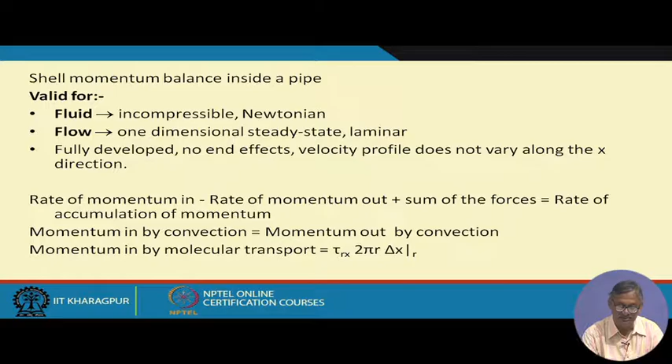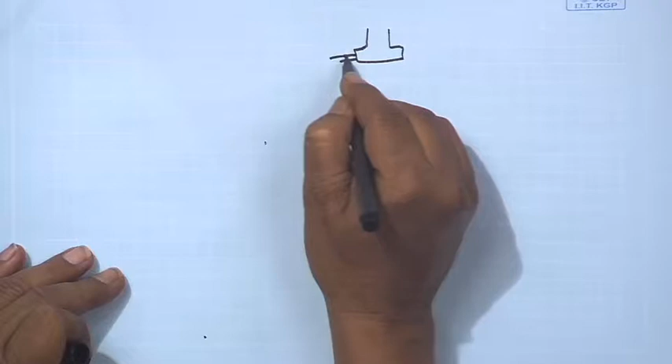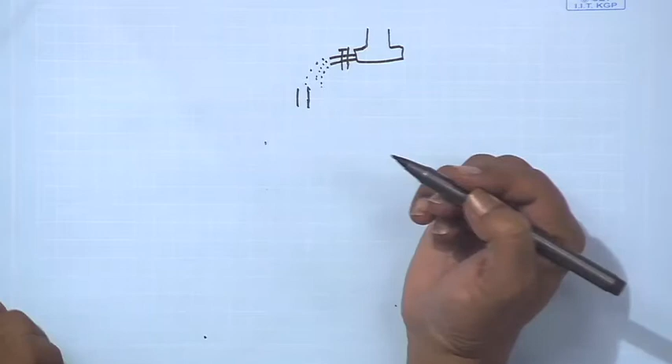If you think that you have a reservoir here, like this, and with that some pipe, there is a valve here. You open this valve, then there will be some point when it will be like this, till the flow becomes a continuous flow, as we gave the example of the hostel. So that flow is fully developed.

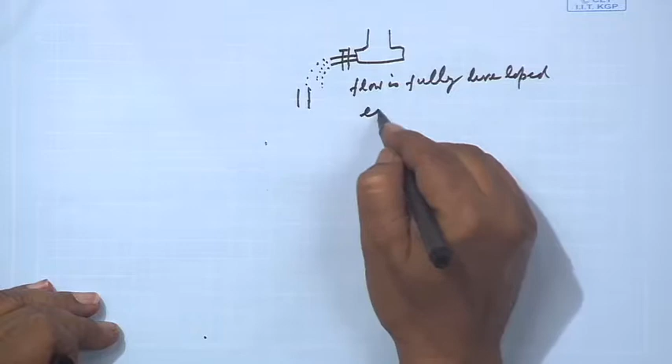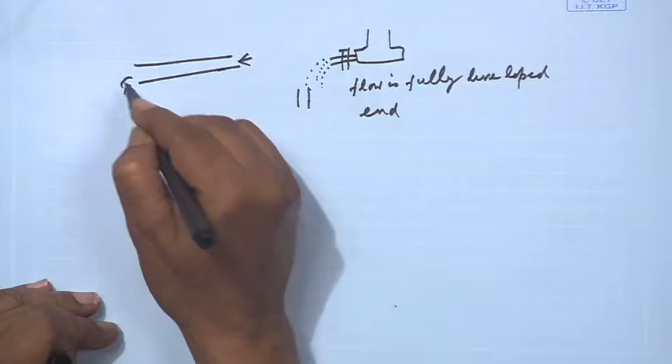This flow is fully developed and there is no end effect. This is what we are saying. End effect means in the pipe, whenever it is coming in, there will not be this kind of maldistribution of the flow. This on either side of the pipe is not there. So there is no end effect also.

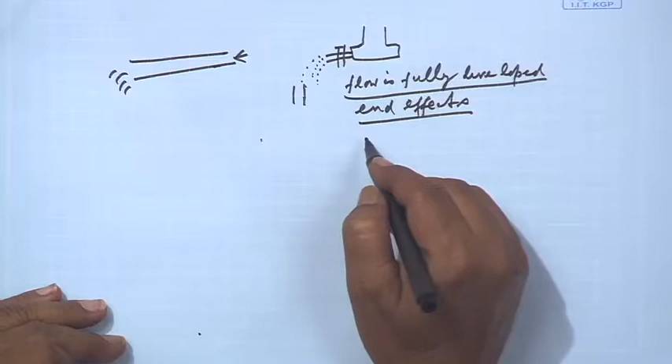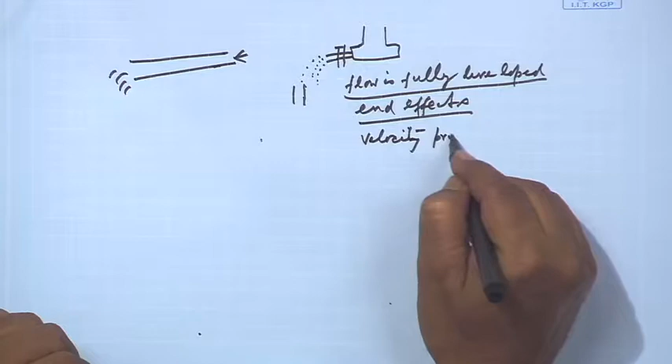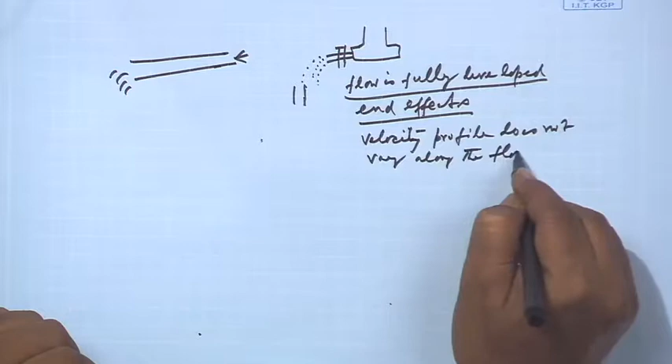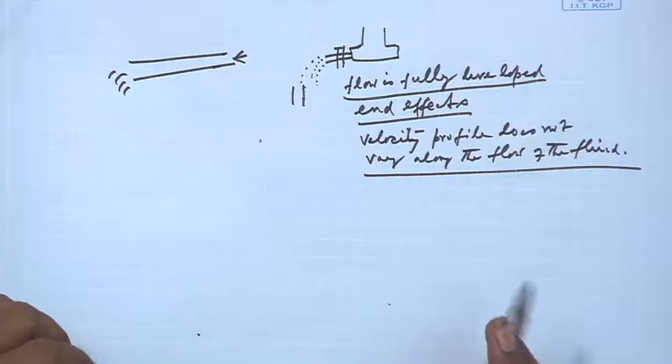This flow is fully developed, there is no end effect, and velocity profile does not vary along the flow of the fluid. This also we are imposing: velocity profile does not vary along the flow of the fluid. So these conditions we impose, and then by doing a shell momentum balance we can tell.

Now, shell momentum balance means here we are taking that shell, this is the section of the pipe.

We assume that in this pipe, the flow is in the R and X direction. If we assume it to be a horizontal pipe, the Z direction is not there. So R is the pipe radius and X is the direction of flow. We have taken a shell like this.

This shell has a length of delta x, and a thickness of delta r. This shell we have considered, and we will do the momentum balance on this shell. This is called shell momentum balance, or control volume for shell momentum balance, on a fluid flowing in a circular tube or conduit.

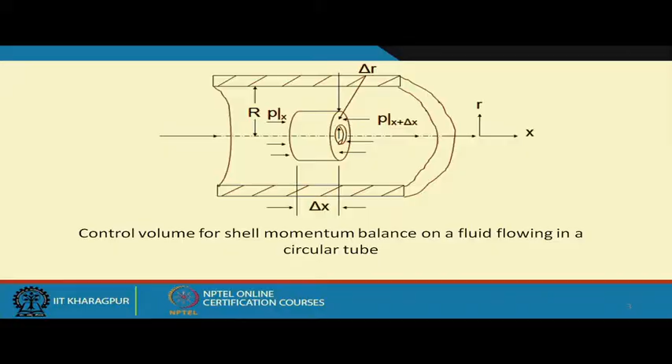So this we will do today, the flow through the pipe. We assumed it to be a horizontal pipe, we assumed the flow to be fully developed, we assumed it is steady state, we assumed the fluid is incompressible, and the fluid is also Newtonian.

We also assume that there is no end effect in the flow, and there is no velocity profile changing along the flow of the fluid.

These assumptions we have made in the beginning, and we are doing axial momentum balance as shown in the diagram, taking a small elemental volume in that pipe section. We will do the momentum balance on the shell and then integrate over the entire pipe.

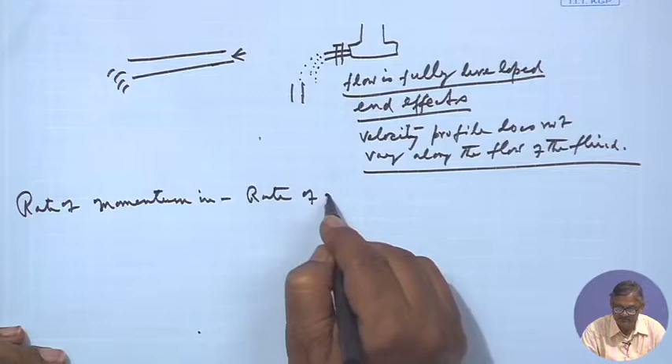So let us do that. The governing equation is: rate of momentum in, minus rate of momentum out, plus sum of the forces acting on the volume element, is equal to the rate of momentum accumulation. Now momentum can be transferred, as we said earlier, in two ways.

One by bulk momentum, that is the bulk flow of the fluid. When the fluid is fully flowing, the bulk flow is one way of transferring momentum. The other is by shear force. Though it is laminar, we can assume the layers to be so close, so small, that the molecules vibrate, and due to this vibration there is transfer of momentum, which we called molecular momentum transfer.

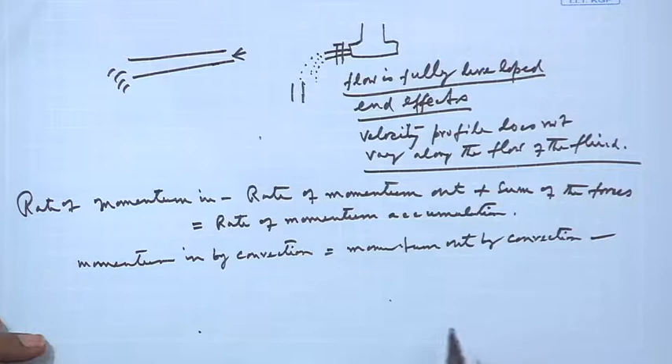Since it is steady state, momentum in by convection is equal to momentum out by convection. So momentum in and momentum out by bulk flow are the same because it is steady state, so by bulk flow there is no net momentum being transferred.

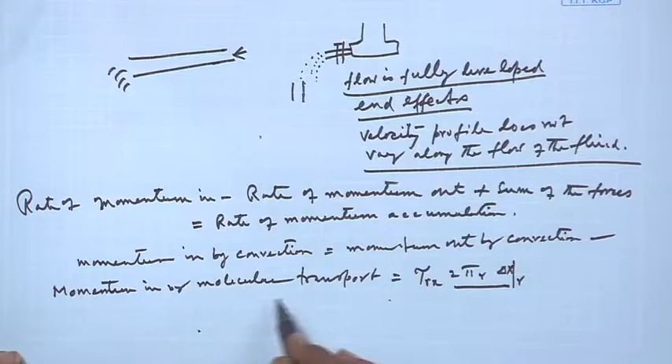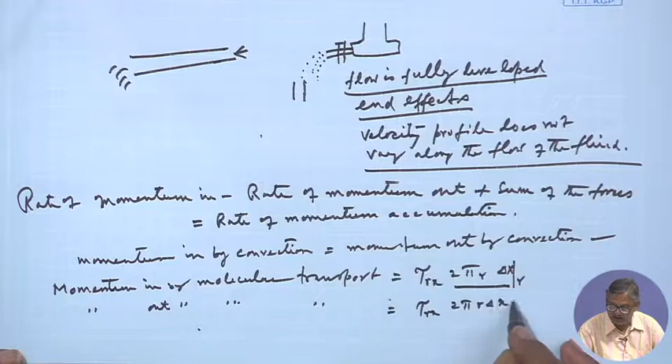Then the momentum in by molecular transport is tau rx times the area 2 pi r delta x, evaluated at the face r. Similarly, momentum out by molecular transport at the face r plus delta r is tau rx times 2 pi r delta x, evaluated at the face r plus delta r.

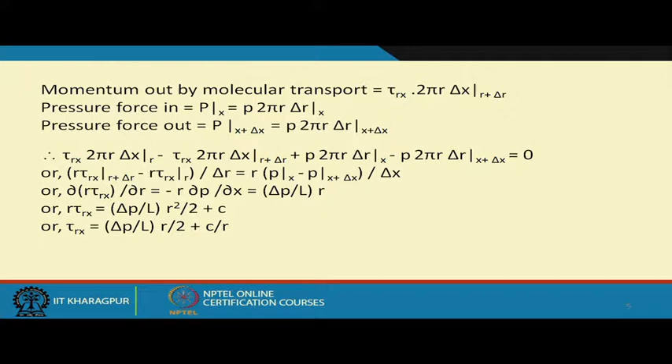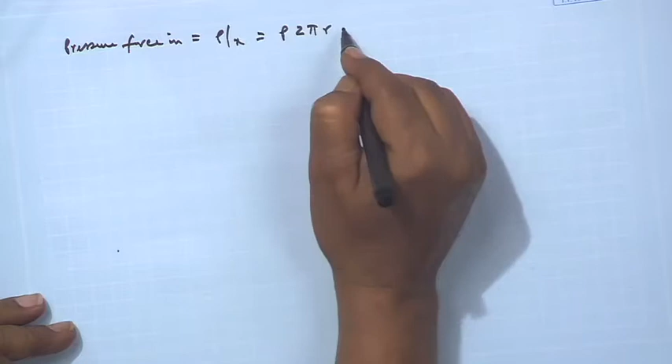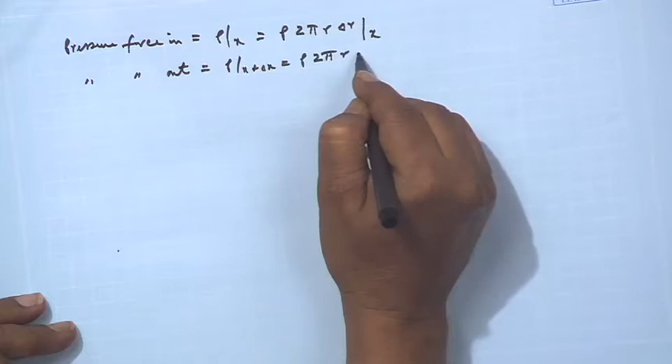Then, among the forces acting on the shell, the pressure force in equals P at face x times the area 2 pi r delta r at face x, and the pressure force out equals P at face x plus delta x times 2 pi r delta r at face x plus delta x.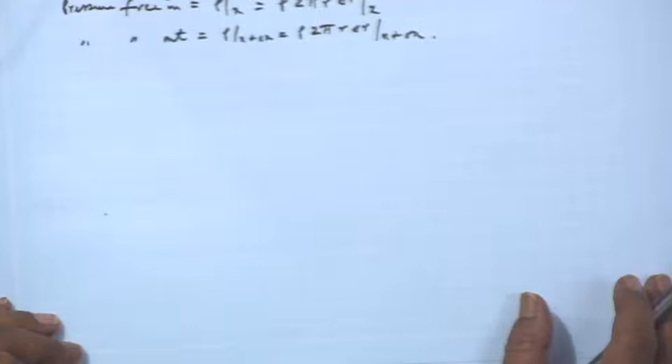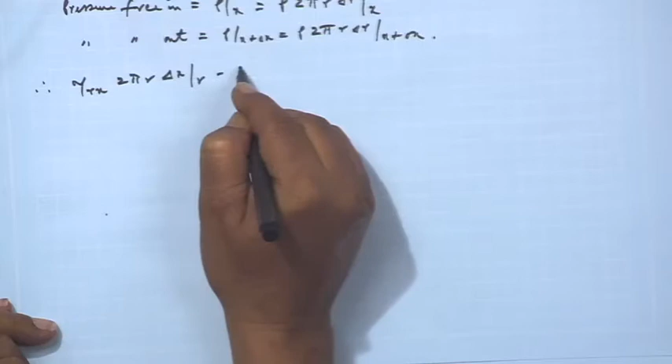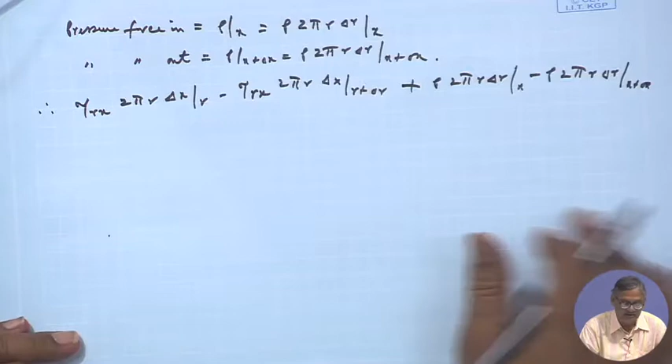Now if we apply the control volume equation we started with: tau rx times 2 pi r delta x at r, minus tau rx times 2 pi r delta x at r plus delta r, plus P times 2 pi r delta r at x, minus P times 2 pi r delta r at x plus delta x, equals zero.

We can divide through by delta x and delta r in all cases, dividing by 2 pi r delta r delta x, which is the volume. Then we can write: r tau rx at r plus delta r, minus r tau rx at r, over delta r, equals r times P at x minus P at x plus delta x, over delta x.

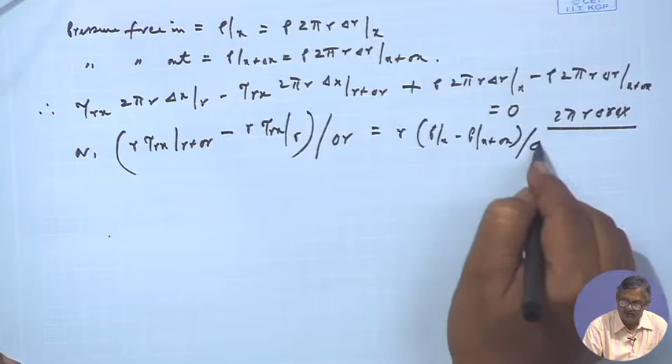So from the definition of the derivative, we can write this as d/dr of r tau rx.

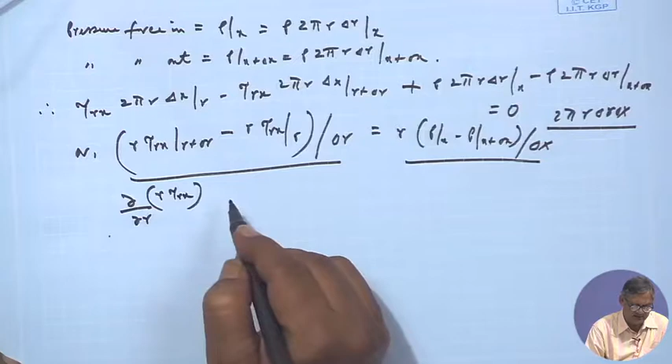This equals P at x minus P at x plus delta x. From the definition of derivative, P at x plus delta x minus P at x over delta x is the derivative, so it becomes negative. So del P del x into r is this side, right. So we can write that this is del del r of r tau r x equals minus r into del P del x.

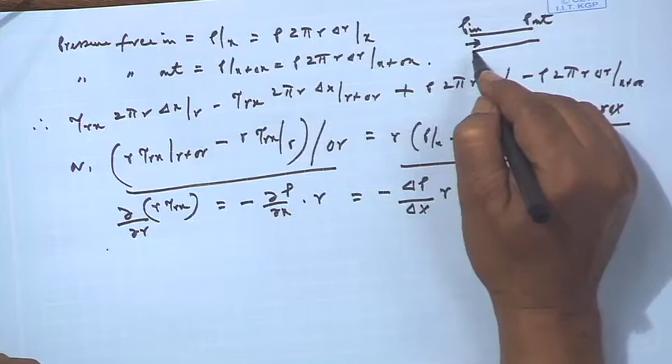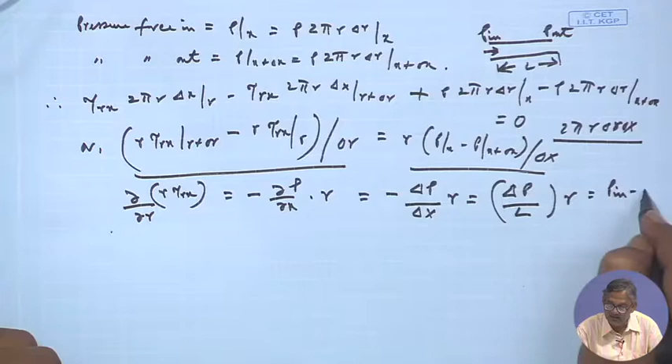So from there we can write this is delta P over, if this length is L, if the total length of the pipe is L, delta P by L into R. Why has this negative gone out? Hopefully you understand that delta P is from inlet high to outlet low. By definition of the derivative, it's P outlet minus P inlet by del x, that becomes the derivative. So this negative has been taken care of by delta P, where delta P is nothing but equals P in minus P out over L into R.

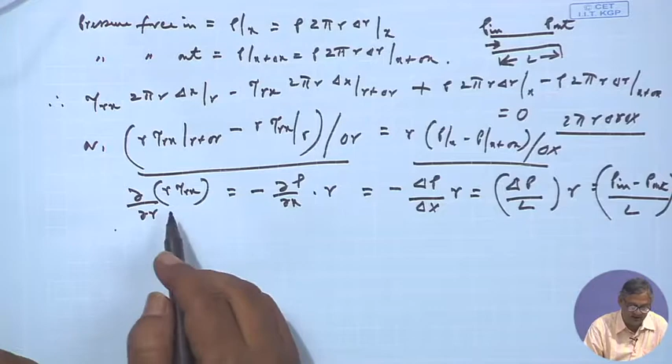So if this be true, then we can write del by del R of R tau R x equals delta P by L into R. So on integration we can write R tau R x equals delta P, which is constant, L which is constant, into R squared by 2 plus C.

So we can write tau R x equals delta P over L into R by 2 plus C by R. So therefore we can say tau R x is delta P over L into R by 2 plus C by R. Now if we put the boundary conditions, what are they?

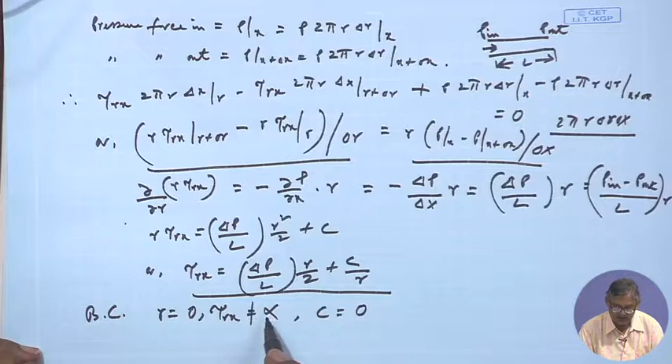At R equals 0, since tau R x is not equal to infinity, we can write C equals 0. Because at R equals 0, if C had some value, then tau R x would have to have an infinite value. Since it is not infinite, it has a finite value, so C equals 0.

Then we can write tau R x equals delta P by L into R by 2, or R delta P by 2L as tau R x. So this, in general, we will use.

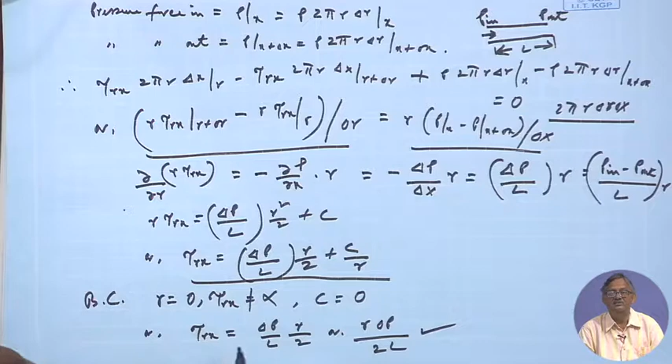Subsequently in many cases you will see this, that when we are doing the shell momentum balance or similar problems, we will start from here: if there is no bulk flow, or the effect of bulk flow is negligible, and it is steady, then whether the fluid is Newtonian or non-Newtonian, we will start from here, that tau R x equals R delta P by 2L, or delta P into R by 2L. This we will start with. Remember this, that this is the starting point in many cases.

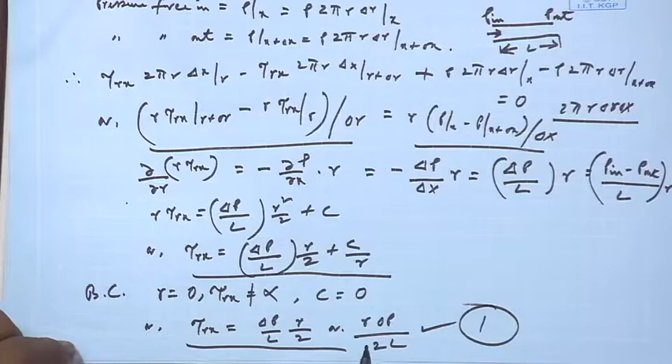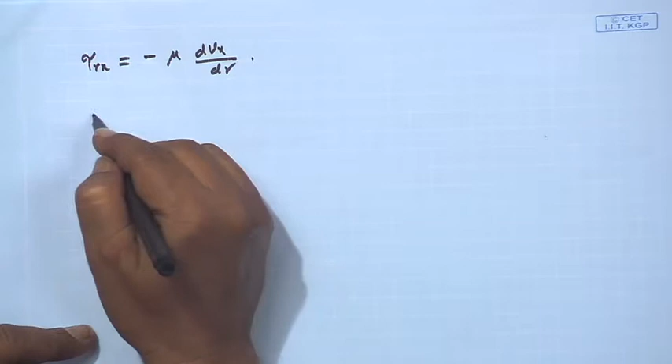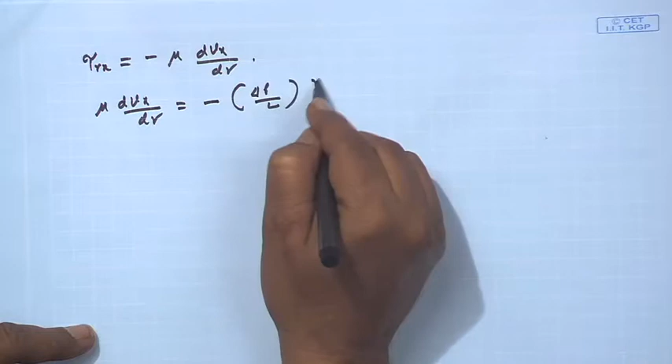Now, since by definition tau R x is nothing but equals minus mu dVx/dr, on substitution we can write mu dVx/dr equals minus delta P over L into R by 2, or dVx/dr equals minus delta P over 2 mu L into R. So on integration we can write Vx equals minus delta P over 2 mu L into R squared by 2 plus the integration constant C1.

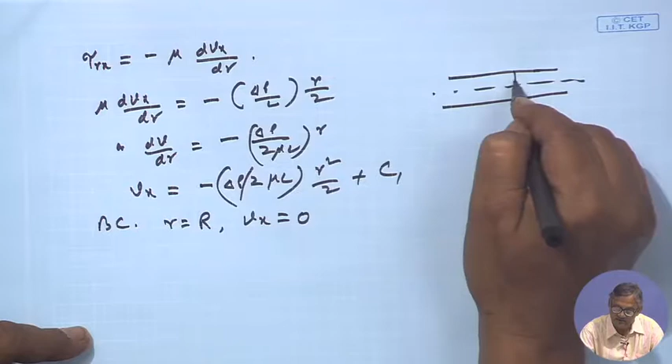So if we write it like this, then we can also state the boundary condition: at r equals capital R, Vx equals 0. This is the axis, and this was R, this was L, or in the x axis this is the r axis, r and x. So at r equals capital R, that is at the wall, Vx is 0 — there is no velocity at the wall. The layer clinging to the wall has no velocity, that we know.

If this is true, we can write mathematically that at r equals capital R, V x equals 0. Therefore, we can write that C1 equals delta p by 2 mu L into R square by 2, so that is equal to delta p R square by 4 mu L, which is C1.

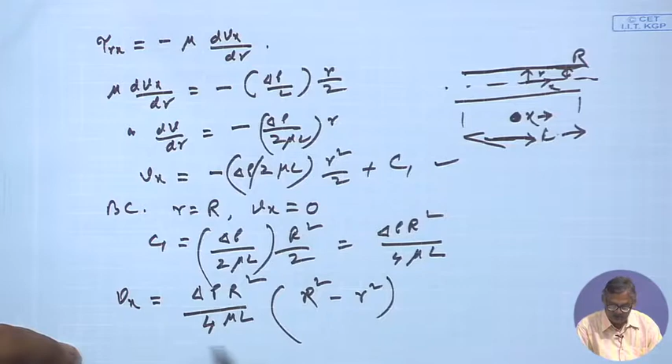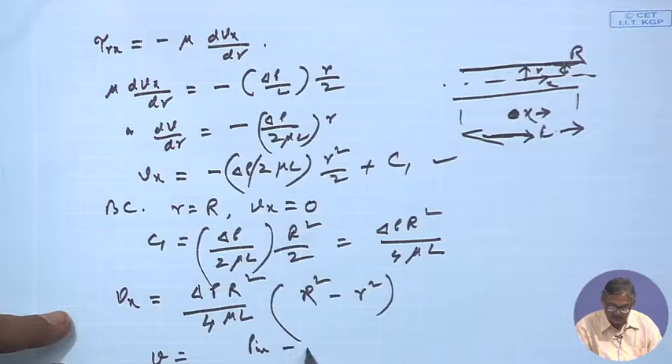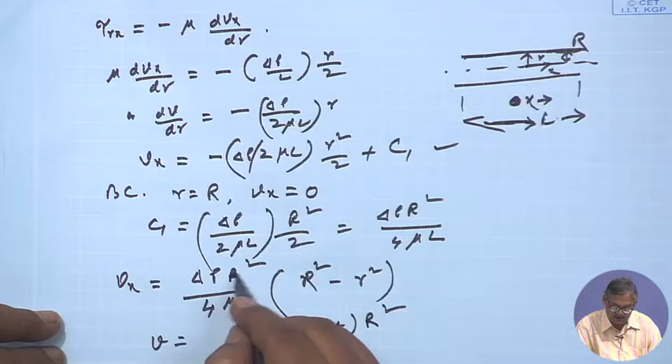So we can rewrite V x as delta p, meaning p in minus p out, into R square. If we take this R square to be there, then this R square does not come out; if we take R square inside, then this does not come, by 4 mu L, now we can write this as 1 minus r by R whole square.

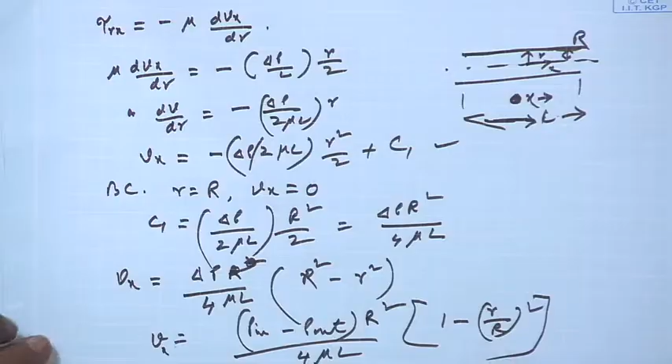So if this is true, then V x is p in minus p out, R square by 4 mu L, into 1 minus r by R square. This is the velocity at any point r.

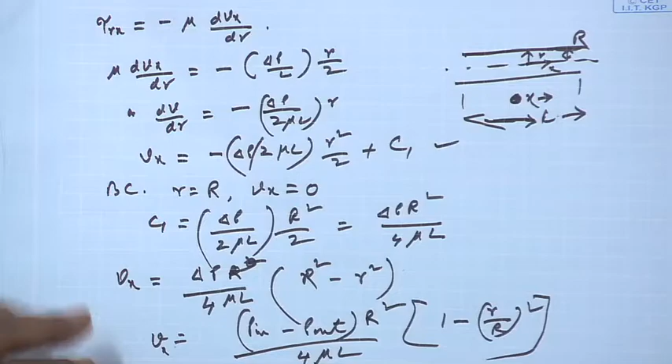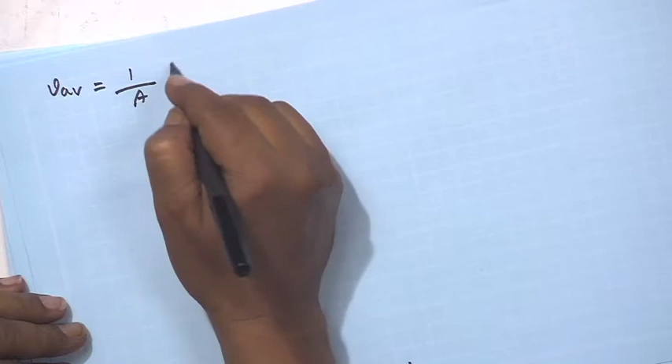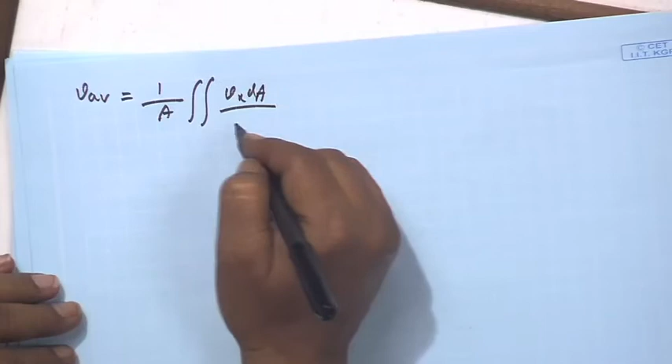Now if we have the average velocity V average, that can be written as 1 by area, integration of V x d area, V x d this area. Now this velocity we can substitute with the V x value.

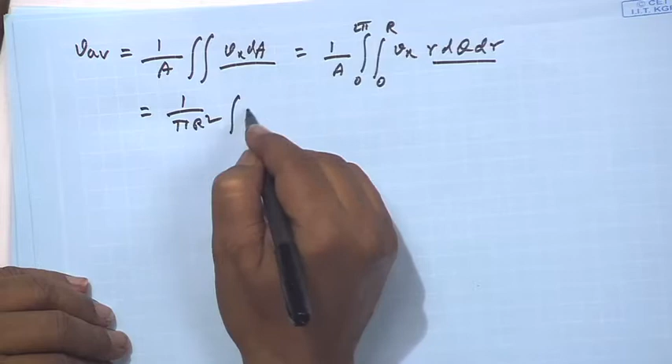This is 1 by A into integration over the area of V x, r d theta dr. This is the elemental area, r d theta into dr, that is area, and this r varies between 0 to R, and theta varies between 0 to 2 pi. So we can write, and this area we write as 1 by pi R square, and we can say this is 2 pi r dr, rather V x.

So on substitution of the value of V x, we can write 1 by pi R square, integral of r into delta p by 4 mu L, into R square minus r square, into dr. On simplification we can write this, again between 0 to capital R, as 1 by pi R square, and this on simplification can be written as...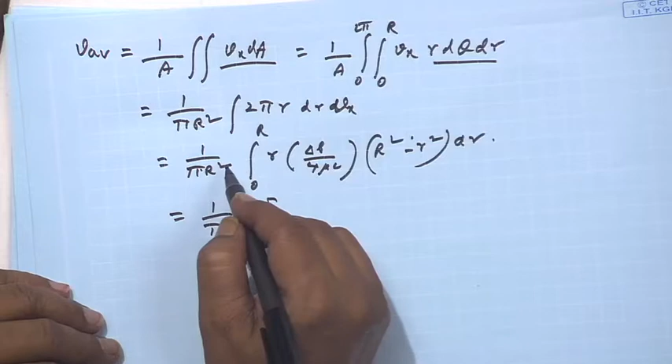2 pi r, okay, this pi r, 2 pi r, that comes out, so pi R square here. That means this pi r goes out from here.

So we can then write this as equal to P0 minus PL by 8 mu L into R square, that is equal to P0 minus PL by 32 mu L d square. So V average then is equal to P in minus P out over 32 mu L into d square. If it is R, then the denominator factor is 8, otherwise for D it is 32. So P in minus P out by 32 mu L is V average, that is P in minus P out into D square by this.

This is called the Hagen-Poiseuille equation, H-A-G-E-N, P-O-I-S-E-U-I-L-L-E, Hagen-Poiseuille equation. This is a famous equation, the equation for pipe flow.

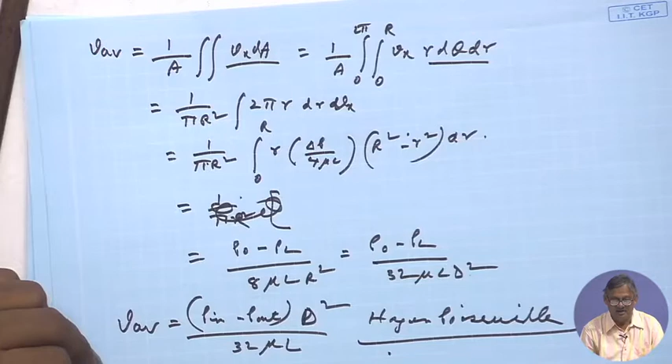If you are asked, under steady state, if the flow is laminar for a Newtonian fluid, how can you find out the pressure drop? You can say you use the Hagen-Poiseuille equation and find out the delta P, with this equation that V average is delta P into d square by 32 mu L, that is the Hagen-Poiseuille equation. Obviously, one more thing here, we can also find out V max.

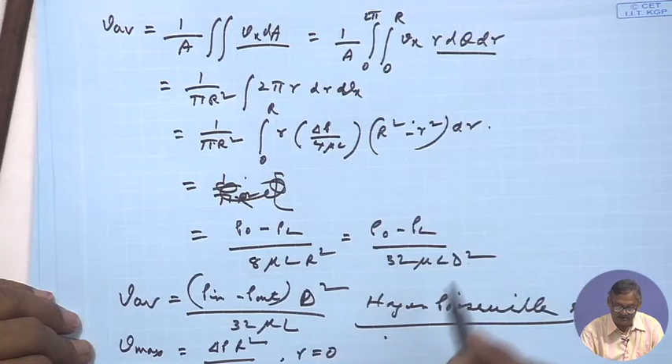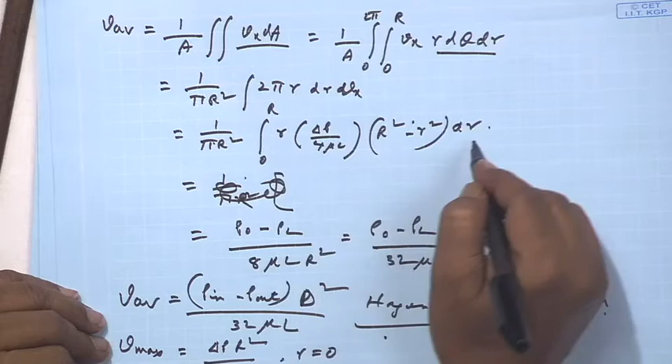V max is equal to delta P, that is P0 minus PL, R square by 4 mu L. This is true at r equals 0. So from this equation which we had gone through, on integration in terms of R, if we put r equals 0 here, then we can say delta P R square by 4 mu L is the V max.

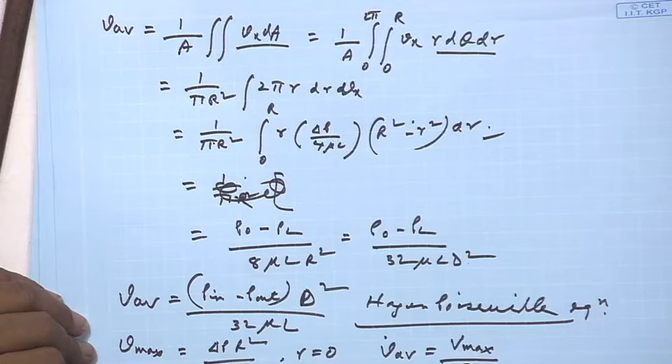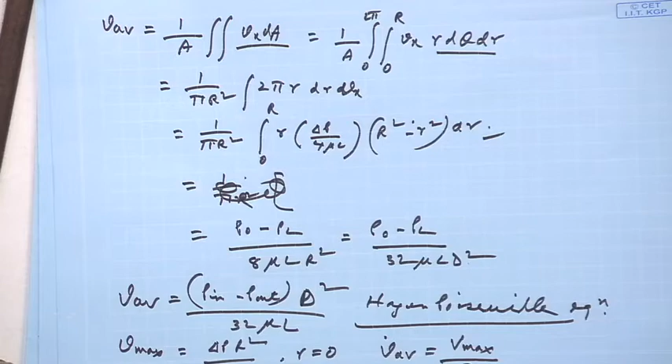Therefore, we can say V average is nothing but V max by 2. Average velocity for a pipe flow is the maximum velocity by 2, or V max by 2, when the fluid is incompressible, under laminar steady flow, there is no end effect, and no velocity profile change along the flow of the fluid in the pipe. In that case we can say average velocity is half of the maximum velocity.